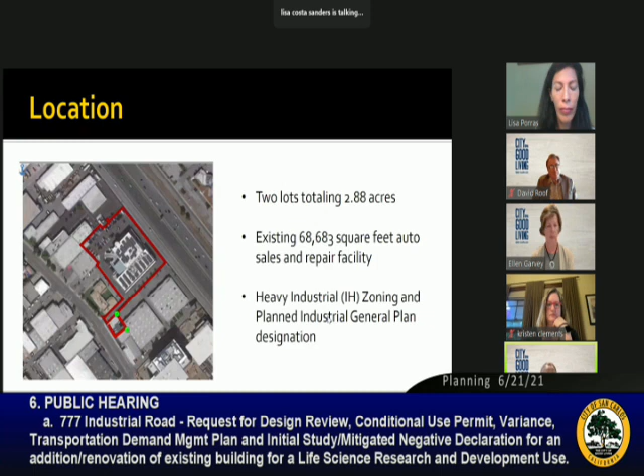The study is currently underway and scheduled to be complete in September. The City Council requested that all projects within the study area that include a request for a planned development zoning designation be considered after the completion of the study. The project before you is not subject to that stipulation as it complies with the underlying zoning with the approval of the requested entitlements before you.

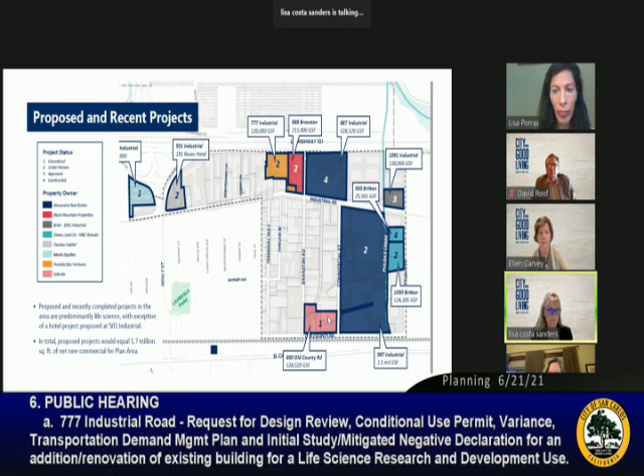Next slide. The site was formerly utilized by Liquid Carbonics starting in the late 1950s, and was acquired and operated by Praxair from approximately 1996 to 2003 for the manufacturing, repackaging, and distribution of industrial gases. The site is currently developed with an auto sales and repair facility with at-grade covered parking utilized by the Honda dealership. The applicant, Presidio Bay Ventures, acquired the property and proposes to redevelop it for life science use.

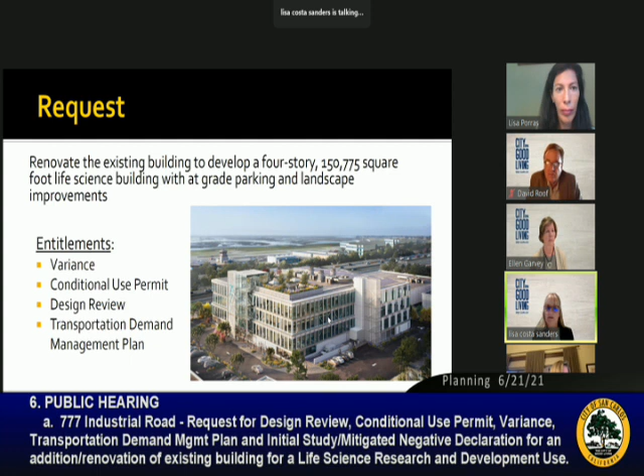Next slide. The applicant proposes to renovate and add on to the existing building to develop a 4-story, 150,775 square foot life science building with at-grade parking and landscaping improvements. The requested entitlements include a variance, conditional use permit, design review, and transportation demand management plan. Now I'll walk the Commission through each of those entitlements.

The request for a variance is from the floor area standards, specifically to exclude the covered parking area, about 28,320 square feet, from the floor area calculations. The existing building was constructed to provide ongoing access to the monitoring wells as part of the remediation efforts, as well as observation of the groundwater contamination at the site.

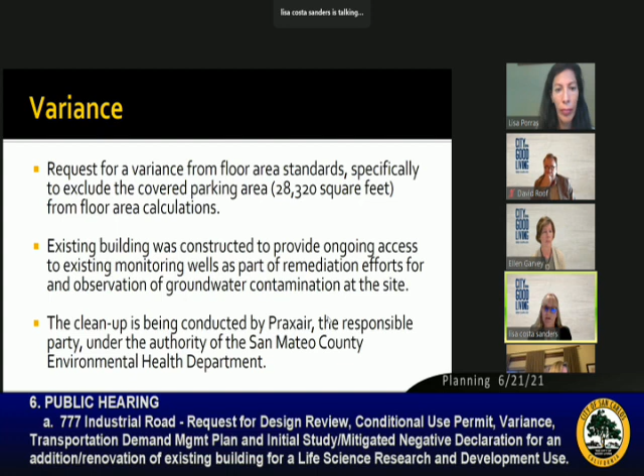The cleanup is being conducted by Praxair, considered the responsible party for the contamination under the authority of the San Mateo County Environmental Health Department. As shown in this graphic highlighted in yellow, the site includes many monitoring wells maintained by Praxair. As you can see from their location, they cover a large portion of the property and really limit the development opportunities.

With the Honda dealership, they were quite creative and found a way to build above those monitoring wells, but still allow continued access to them by placing at-grade parking beneath the building.

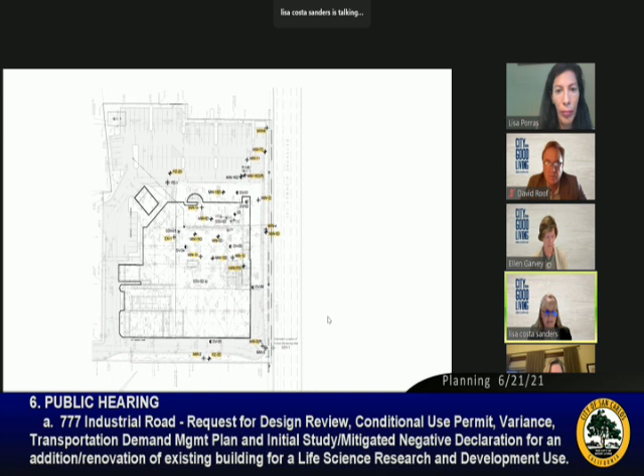On the next slide, staff finds that the required findings to grant a variance can be met at this site. The presence of the active groundwater monitoring wells is exceptional and extraordinary. The monitoring wells present a physical hardship that limits the development opportunity at the site. The granting of the variance will not be detrimental, as evaluated in the mitigated negative declaration, and the project is consistent with the general plan as well as zoning.

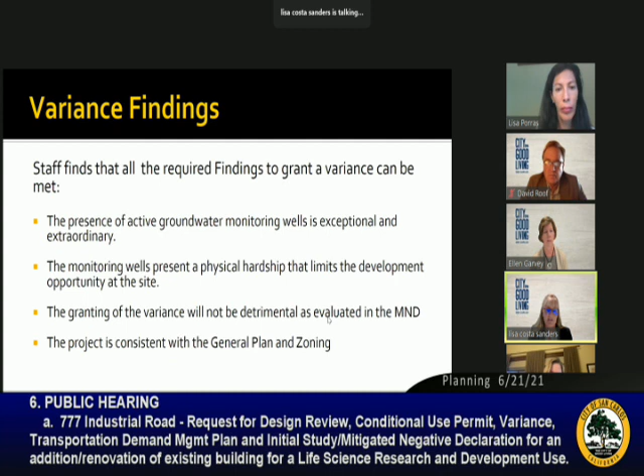The conditional use permit is requested to allow 2 stair towers. Both comply with the 16-foot height projection, but not the corresponding setback from the wall face without the issuance of a conditional use permit. The code requires that for each foot above the 50-foot height limit for a tower, the element must step in 1 foot from the face of the wall. In this case, it either projects away from or is flat with the face of the building wall, so the code allows a conditional use permit to be issued by the Planning Commission.

The stair towers are centrally located on the building with large setbacks from adjacent properties. The stair towers add to the architectural interest of the building, and staff is supportive of the conditional use permit request.

Next, for design review, this facade is the northern facing elevation, which is the main entrance to the building. The renovated building would maintain much of the existing footprint, but seeks to create a more uniform and larger dimension compared to the existing building, and would include changes in wall planes and building heights. The design shifts the building from a predominantly concrete facade to one of glazed glass, with variation in materials and patterns, as well as offset floors to accentuate sections.

The proposed exterior building materials include brushed aluminum slab covers, spandrel or opaque bird-safe glass, exterior glazing, and cement plaster. The facade for this stair tower would be perforated metal with backlighting to provide greater contrast with the building face.

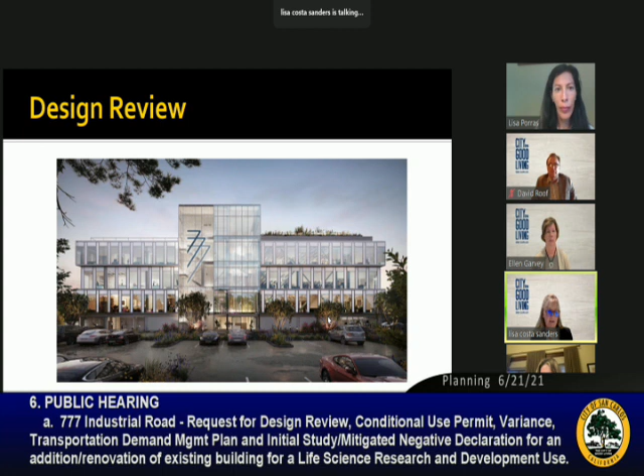The next view is a rendering of the building, showing the north and west facing elevations. The building is 3 stories of life science use above covered parking area and complies with the 50-foot height limit. You can also see the rooftop landscaped amenity feature that would be available for building occupants. The next view is of the building along Highway 101.

Here you can see the south and east facing elevations, as well as that tucked-under covered parking area. Staff is supportive of the architectural design of the building.

The applicant has also submitted a transportation demand management plan with measures to achieve a 20% trip reduction. That includes bicycle parking, a repair station, showers, a changing facility, as well as a commuter program with marketing and outreach to encourage transportation alternatives. This TDM plan has been reviewed by the City/County Association of Governments, and they found it meets the requirements of the county's congestion management program. The city's transportation consultant also reviewed the plan and found it complies with the city's requirements.

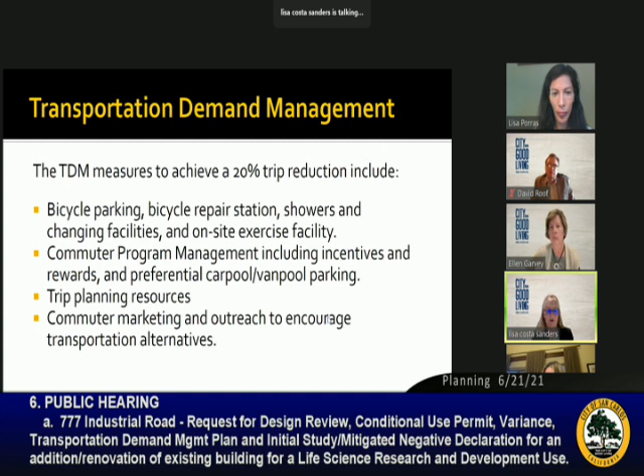On the next slide, I've shown you the distance the site is from Caltrain. It's approximately a half mile to the Caltrain station, about a 12-minute walk.

Finally, a mitigated negative declaration has been prepared in accordance with California Environmental Quality Act guidelines. That analysis found the proposed project would not result in any significant impacts to the environment with the implementation of mitigation measures. The project is subject to mitigation measures included in the MND, as well as attached to the resolution in your packet. These are standard for this type of development and include construction best management practices, nesting bird survey, measures if cultural resources are discovered, requirement to implement the recommendations of the geotechnical report, as well as implementation measures for the TDM plan.

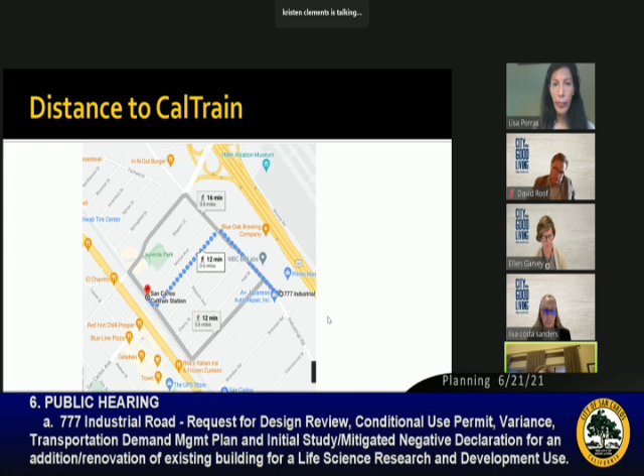Thank you very much. That's all the questions I have, Chair. Thank you. Any other questions?

I just had one comment, and Commissioner Clements got to the issue of trees. 41 trees were required and 47 trees are being proposed. I was hoping for more trees, and Lisa, it sounds like the fire department has some regulations that necessitated this, because when I looked at the one rendering that showed some trees, they looked really spaced apart, and I thought we could fit in more trees, but it sounds like we actually can't because of these fire codes. Can you clarify that?

Well, it's really around the fire access route, so it just takes you around the perimeter of the building, and then also that flag access driveway. Between that access road and the building, it's difficult to have any large trees because they're going to grow and block the fire access. But in the parking area and around the perimeter, there would be an opportunity. We can have the applicant maybe discuss if there's an opportunity to add additional trees to the landscape plan.

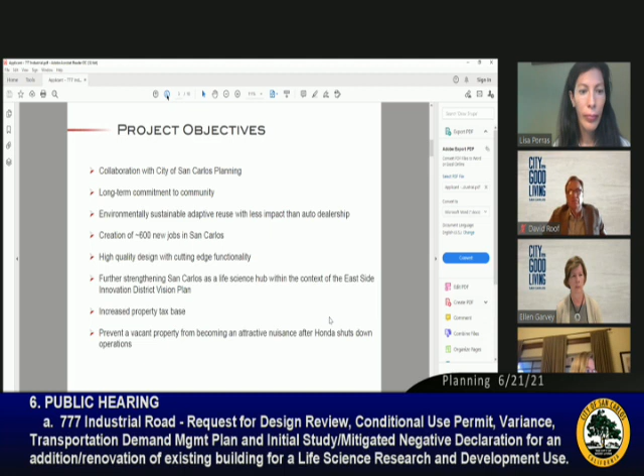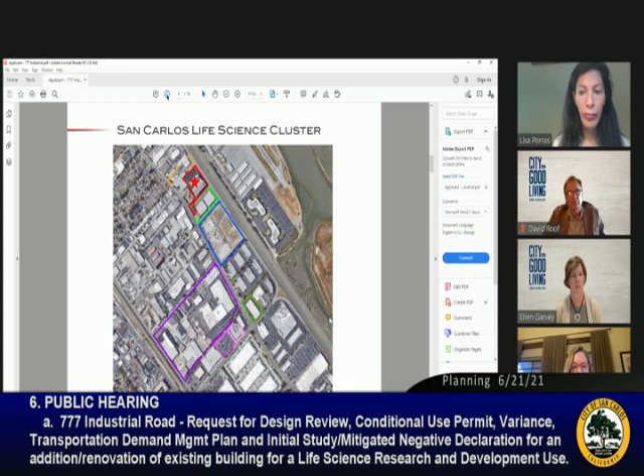Lisa, if we could go to the next slide. We've touched on the fact that this is within the existing and burgeoning life science cluster. If we can go to the next slide - as it relates specifically to our project, we covered the odd panhandle shape configuration of the site itself.

Touching on the comment about trees, we've sought to maximize the placement of trees within the constraints provided to us by fire. This is our latest landscaping plan, and to the extent possible we've continued what exists in terms of trees along Industrial in front of the Melodic Remedy studio, and tried to maximize the parking lot immediately on Industrial that wouldn't have fire restrictions. You can see on the bottom right of the screen that's really where we've concentrated a lot of the landscaping in terms of larger format trees. We do still have trees along the building itself, but given constraints within the fire lane, we've had to maintain species that are shorter in height and narrower in canopy.

In fact, those larger format trees providing shade through the surface parking area were actually twofold, further covering the drive aisle to the east - that's what we had to keep clear to provide unobstructed fire lane access. So the original intention was to have a double canopy along those islands, but unfortunately we weren't able to accomplish that. We've maximized the site landscaping, and though we're limited in the number of large format trees with wide canopies, it will be a lush site that we hope accomplishes the goals the commissioners raised around landscaping and mitigating the heat island effect.

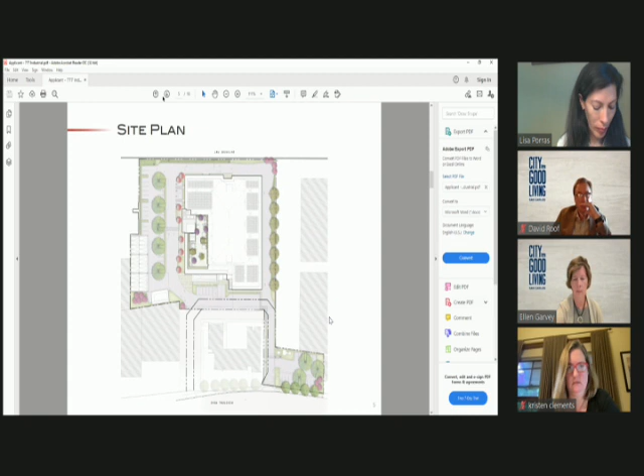If we can go to the next slide - by point of comparison, we actually have 47 trees compared to the existing 24, though our footprint is essentially the same as the existing building. We're squaring off the existing footprint and adding a full floor to the project within the height limit, with the exceptions Ms. Sanders highlighted. But we're close to doubling the number of trees. Again, we'd hoped to provide more, but ran into those limitations.

We're also providing extensive bike parking facilities, locker rooms and showers, as part of our TDM measures, 20 carpool and van pool spaces, EV charging, and motorcycle parking spots, all of which we hope will help enhance the optionality of commuting and transit to and from the building.

As a building, we're also going to be providing e-bikes as a building amenity so that our tenants during lunchtime and so on can take those, even if they don't have a bike or don't have one at their workplace, can just grab a bike and ride downtown, again to help mitigate and minimize the congestion.

In fact, the city's traffic engineers' transportation study demonstrated that with all of that, the proposed building, despite its size increase, actually decreases daily traffic and peak hour traffic won't change from prior to the dealership that's in place, which is a rather heavy and impactful use. If we can go to the next page, please.

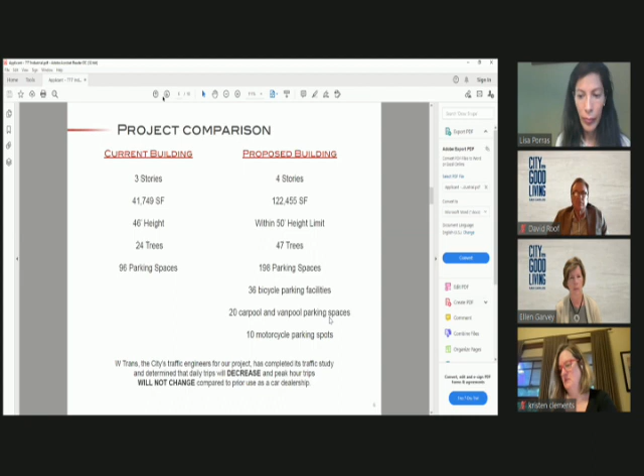We, as a firm, are really committed to ensuring that we're a long-term member of the community, and look to ensure that as part of any planning process, we're listening to and trying to address as much of the concerns that may be directly related to our project, but also may have broader implications to the neighborhood, unrelated to our project at least directly. This is some of the broader categories of items of discussion we've had with various neighbors and members of the community, and some of our responses as well.

There was some question and concern around light pollution, particularly given the proximity to the residential housing. In accordance with LEED standards and Cal Green, we'll have light sensors and motion sensors all the way throughout. There won't be any light pollution, in that all the site lighting is going to be concentrated and directed strictly to the minimum levels of foot candles required for code compliance, and focused on the pedestrian areas of circulation on the site.

In terms of landscaping and the pedestrian views, there's a slide here showing before and proposed that highlights that we really sought to enhance the surface parking lot on Industrial, which is really the only frontage on Industrial that we control, to significantly landscape and essentially obscure the view of our building.

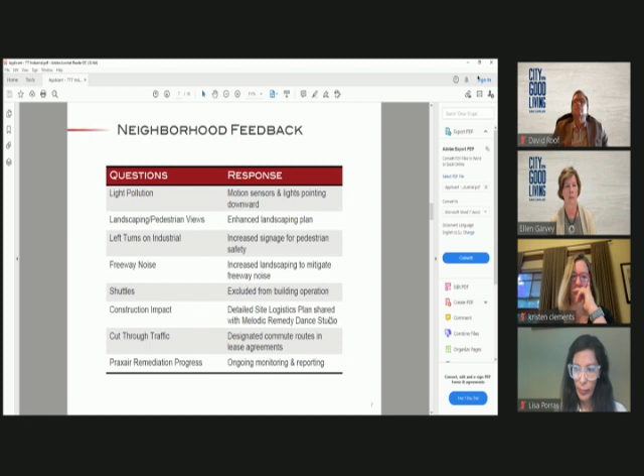Further, and again we're unsure of the circumstance around this, but our site and the 767 site, which is the property where the dance studio is located, depend on reciprocal easements for ingress and egress.

There's no intention of impacting or shutting down either of those sites, since both are dependent on them. We understand there may have been some closure during the construction of the Primo Honda sites, but that was really the extent of the concern and the communication.

We also had discussion around the existing remediation efforts that Praxair is responsible for, and provided an update on the status. That is ongoing, and from Afton, the consultant overseeing the remediation, their reports show it is progressing very positively, which is great news.

If we can go to the next slide, please. This was just a highlight of the site logistics plan for construction, showing that we would be staging and handling all of our materials and storage within our property and away from the easements and access.

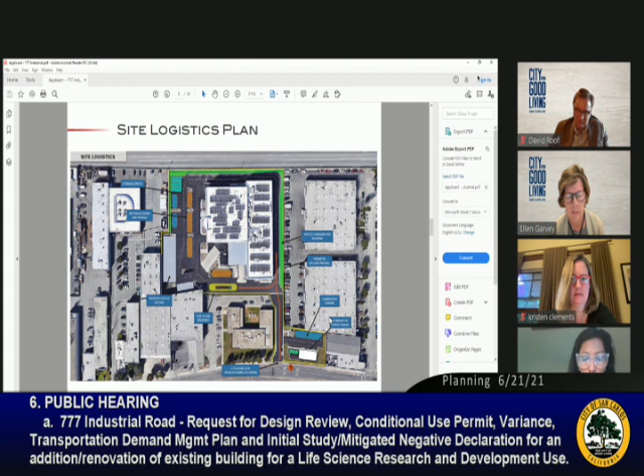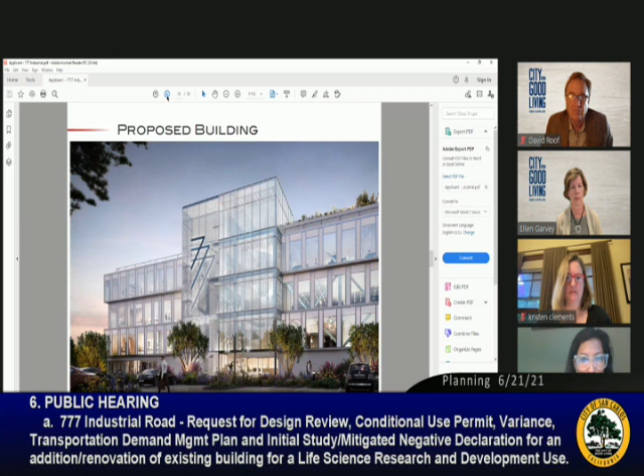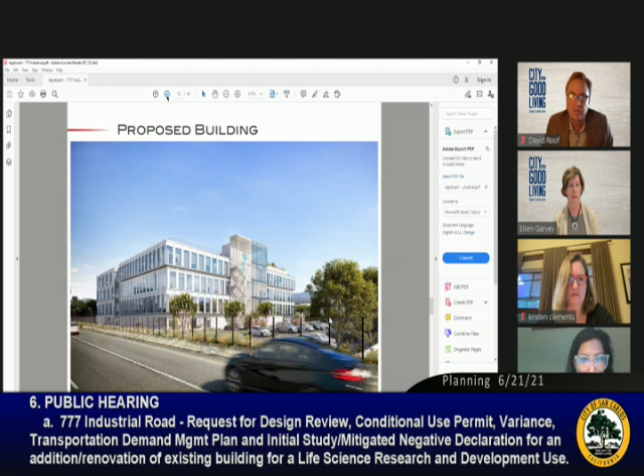If we can go to the next slide, that's the enhanced landscaping we're proposing, again just to obscure the building. I'd note the building on the right in the rendering was our assumption of what the 888 Branston project would look like—it may not be 100% accurate. We just wanted to show that our project's view is obscured from Industrial Road.

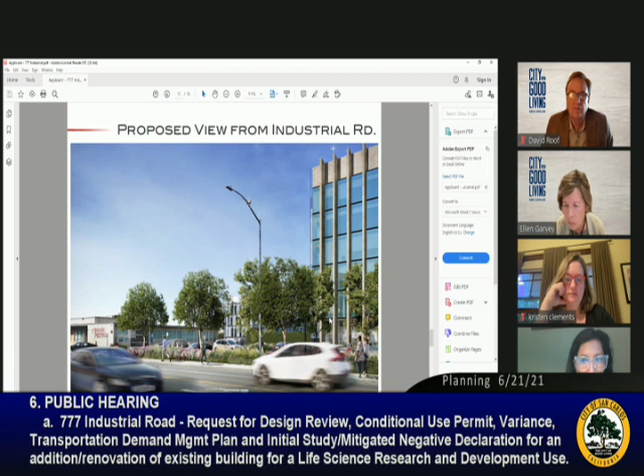Just some highlights in terms of our ongoing commitment to the community: we are members of the chamber. Presidio Bay, as a firm, has a longstanding commitment to education efforts. We have an ongoing real estate scholarship program that we're running every summer. This is the inaugural year of us doing it formally.

We plan to continue that. We're also building out extensive childcare in several of our facilities and projects. Similarly, we're not just commercial developers—we do quite a lot of housing and multifamily development, and have been speaking with Al and Lisa about opportunities to explore housing production and residential development in San Carlos. While we build commercial, it's also important to provide housing for those seeking jobs there, to help address our housing shortage, which is affecting every jurisdiction statewide.

So with that, I just wanted to thank the commission for your time. Lisa, I think we can go to the next slide and hold it there.

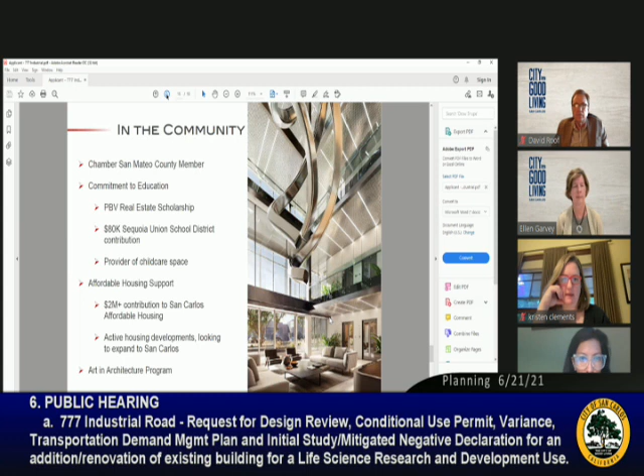Thank you very much, Mr. Sanandaji—I hope I pronounced that correctly. You did. Thank you so much for your time. We're available for any questions. My colleague Sandra is here as well, who's the architect and can speak to any of the more technical questions.

Well, thank you. One comment before I ask my fellow commissioners if they have any questions of you or your architect before we hear from the public.

I was pleased to be refreshed with the rendering showing all the trees you'll be planting out front by Industrial, by that parking area. I drove down Industrial today past the new Meridian complex that is just finishing up, and they are fully landscaped. For the first time, I saw two people jogging on that new sidewalk by the building and one person walking a dog, so it was really pleasant to see. If they continued down the street, they'd run past the new trees you'll be planting in that new parking lot. So I was really pleased to see that rendering.

Thank you. Do any of my colleagues have questions of the applicant or the architect before we hear from the public? I have a few. Oh, go ahead. Commissioner Roof, and then we'll go to Commissioner Bradley.

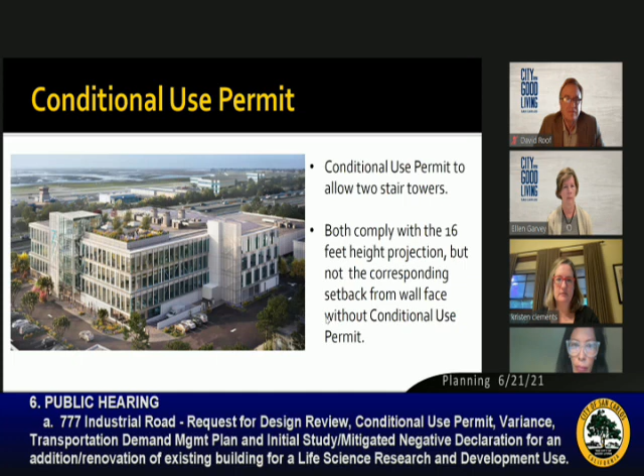I think the best view would be the rendering with the trees—the one with the 3 trees and the higher building to the right. That's the pedestrian, vehicular, and bicycle perspective of the project, given the panhandle shape of the site—it's essentially straddling the freeway.

Right, so it's set back and not directly visible. And then the entrance—which side of the building is it on, this close side? That's our property and entrance where the monument sign is. Got it, which is currently shared via the easement. Well, the shared easement is actually on the northern side, on the northern side of the Melodic Remedy building.

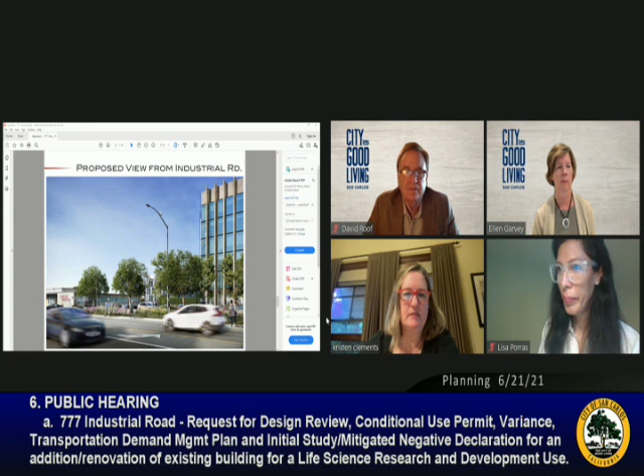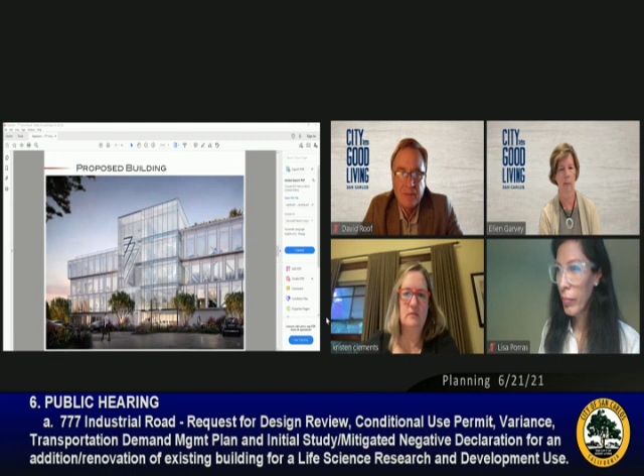Lisa, do you mind going one slide back? Perfect—so the current Honda monument sign location would stay, but that marks the entrance to the property. Lisa, if you don't mind going to slide 4, I was just going to pull up the landscape plan to point that out. Yeah, you can see where the arrows are—that's our property there. And the easement is actually on the northern side, that gray area.

So in essence, the tenants of Melodic Remedy and ours would use what Lisa just highlighted. Okay, and the dance studio is right to the left of the red dotted line? Is this one? It's that building, exactly. That's right—thank you for clarifying that.

One of the challenges in industrial buildings is trying to balance the needs of the buildings, which often have surface parking and a center building with parking around. It's a large structure with something that hopefully is a little more fine-grained that people want to walk near and be close to.

You certainly hit the mark on the attractiveness, and it's too bad it's really hidden from the street. It's more of a highway view, which is all good, but at some point perhaps those front parcels will also be redeveloped, and hopefully we'll get more of a view of your pretty building when that happens.

I wanted to also commend your use of parking stackers and making the most of the space that you have. And I'm excited to see the TDM program resulting in a decrease of parking spaces, providing additional ways to get to Caltrain and using the assets we've got, even though you're situated so well close to the highway. That's great news, I think.

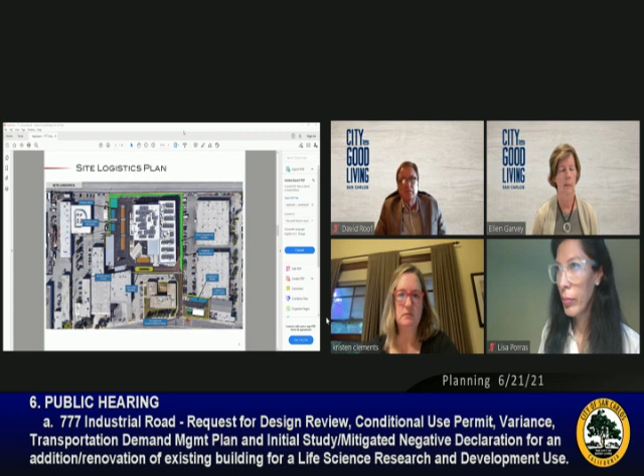When you mentioned that you did include childcare spaces in some of your buildings, I was wondering whether that was a consideration for this building, and whether that did not work out. Candidly, not for this building, but for the new project we're exploring, that is certainly an amenity we're exploring, partly because we are limiting any occupancy on the surface level, on grade, due to the wells and the remediation. Given that there's active remediation at the site, we don't want to encourage that type of use. So our other project, which we've just started, is more appropriately positioned for that.

Thanks, two more comments, then I'll hand it back off to my other commissioners. One, you named different organizations in the community you were talking to. I wanted to suggest that the ability to use office space or meeting space for the community is going to be in high demand for some of our nonprofits as they go through a difficult period with giving and have had to consolidate operations. In full disclosure, I'm on the Community Foundation Board of San Carlos, and that's another avenue for you to talk about these issues. I know this has been brought up on other projects, the access for the community to meeting spaces, and the ability for nonprofits to potentially share or access cubes and office spaces. So I just wanted to run that by you and see if you're open to that.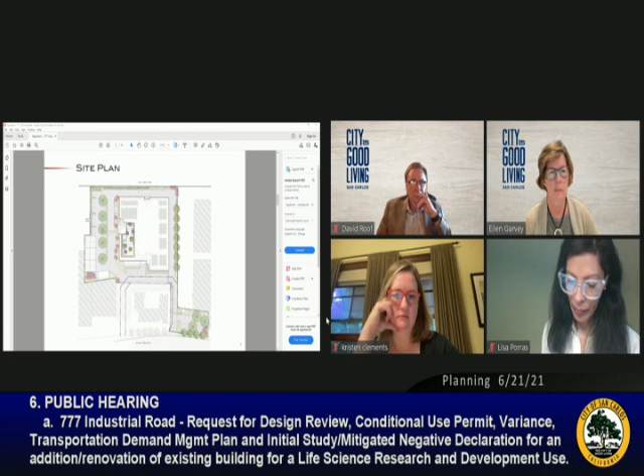But everywhere else other than the occupiable roof deck is going to have those solar panels reinstalled. And because we have more roof area, we can actually accommodate the solar panels that are all there despite these additions. That's good to hear. So you'll be able to accommodate the roof recreational area with still the same quota of solar panels that were there and that you still need, and the additional mechanical infrastructure as well. All right, that's very helpful and good to hear.

Thank you. My second question, I wanted to learn a little bit more about these stackers. This is the first project I've been on, I think, where there's been stackers used in a commercial situation like this. In reading through the packet, it said that the stackers would be somewhere between 3 and 5 levels, TBD for the future. I'm wondering if you've decided a little more firmly how many levels it is, and I couldn't quite figure out how many levels were going to be below grade. Can you help me just understand a little bit more about these stackers?

I absolutely will. And they say a picture paints 1,000 words, and I'm remiss for not including a picture, but I will try to describe what the shuffler or puzzler system looks like. There's no below grade excavation, so it's actually on grade. Picture driving into your garage at home.

It has a roll-up gate or garage door. You drive in, and there's really only 2 or 3 dedicated spots that you would drive into, and everyone drives into the same ones. Almost like a game of Tetris, what you're driving onto is a platform sitting on small wheels, tied to a system with pulleys, rails, and tracks. You would pull in, park your car, and leave. That is your dedicated stall that you will always park in, meaning the same gate you always drive in and out of.

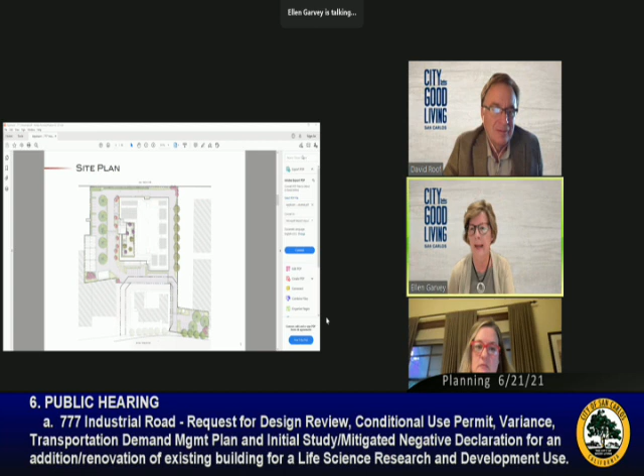Okay, great. My question follows nicely from the one on parking. The TDM plan - I was pleased to see you used conservative estimates for the number of employees per square foot for office space and lab space, so hopefully the TDM plan holds in terms of the amount of trips required by the building. But as you were alluding, there's some uncertainty about that.

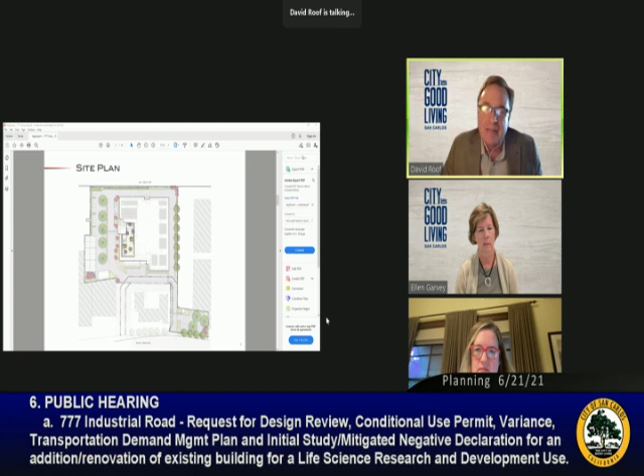So I saw that there's a 5-year review of the TDM plan. Is that 5 years something mandated by the law or code, or is that something built into this proposal? I don't know if that's a question for the applicant or for the city staff.

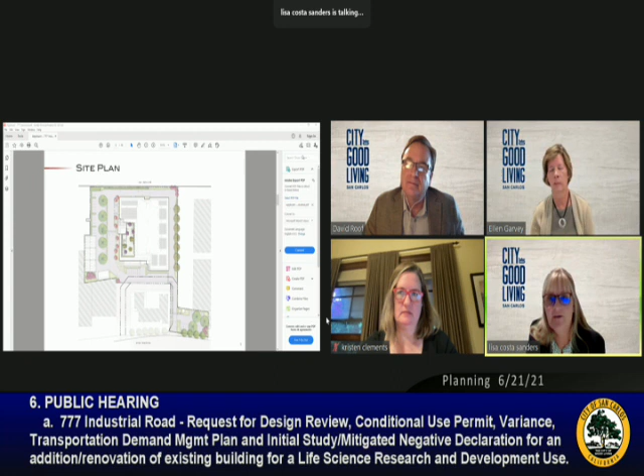I'm curious. Yeah, I'd be happy to answer that. We've placed it in two areas for this project. The city's municipal code does require the monitoring, specifically after the 5 years.

We've also included it with the mitigation monitoring plan that's part of the CEQA document, because we're relying on implementation of the TDM plan to comply with the new CEQA requirements for vehicle miles traveled. So we need to show we're reducing trips and complying with vehicle miles traveled. We've also included it as a mitigation measure to ensure ongoing monitoring, and if they're not meeting that trip reduction, they'll have to come up with another implementing measure to do so. So we've got it in 2 places.

So that would be a 5-year run, and then there's an opportunity to fix it if needed. That's correct. Yes, 5 years seems pretty long, but at least there's an option to fix it.

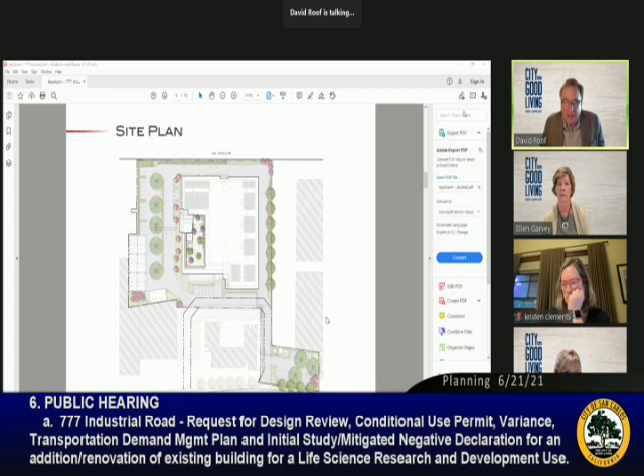Is there a drop off for the applicant, a drop off zone, or for car services, or if the shuttle were to come along there, where would that sort of activity be conducted?

Commissioner, if you see there's an ADA path by the middle large tree in the parking lot going to... Oh, the crosshatched? That's the crosshatch there, yeah. That area is essentially a passenger loading and unloading zone. The idea would be that through cooperation with rideshare services and so on, we'd designate that as the passenger pickup and drop off area right at the front door of the building.

I see, okay. Yes, so it's a way to multi-purpose that space with the fire department needs, and also have it be a drop-off zone. Okay good, I'm glad to see that's there.

I was happy to hear you're providing e-bikes, because with all these big buildings going up, it's nice if employees have an opportunity to zip into town to go shopping or to a restaurant during lunch. So the e-bike plan sounded really good. Was that part of the TDM? Is it a mandated thing, or a nice to have?

No, I don't believe so, but that's just something we've always provided bicycles for as part of our developments. Now that e-bikes have become more prevalent, given the distances we're talking about, it makes riding a bike a lot more accessible to folks, even with joint pain or otherwise. It's not necessarily a strenuous activity to ride down to Laurel Street downtown from the site. Those things go relatively quickly too, but it's just something we've been doing. There are other mandated requirements, like a transit screen, and we're putting a very prominent one in the lobby, integrating it into part of the art we're doing in the entry area. But no, the e-bikes are just an example of something we like to encourage, sort of out-of-the-box thinking to promote different behavior.

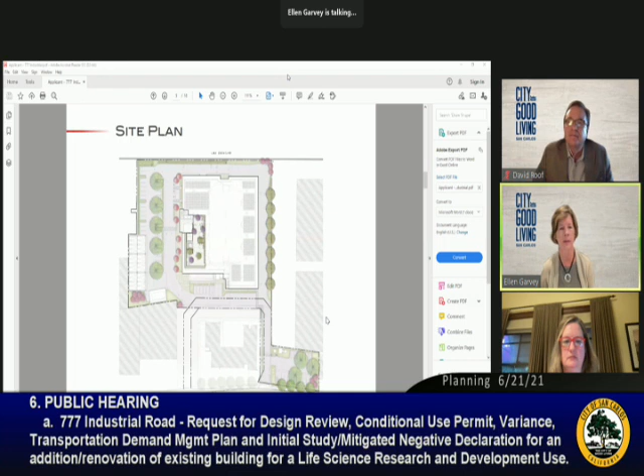Okay, that's all the questions I have at this time. Any questions from any other commissioners of the applicant, the architect, or staff before we hear from the public?

Bradley has one more question, and I'll precede it with a favorable comment. I was delighted to see a relatively small sign, and I believe it doesn't face 101, which in my opinion always creates safety hazards and distraction for high-speed driving on the freeway when there's advertising or directional signs on buildings along 101. Congratulations on that sign item.

Question is, there were comments from a leasee or developer next door, the adjacent 767 property - I believe it's a dance studio for young people - with an idea of increasing the width of the easement for access to both your building and theirs in the future. They had some good ideas, and I didn't see follow-up from the developers and the staff. Can you put a little light on that for me, please?

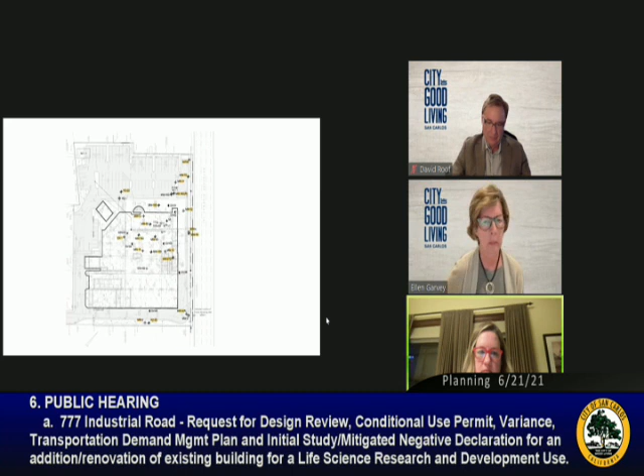Well, I can give my thoughts on this, which is that because of those wells and the desire not to put the parking underground, they're stuck with at-grade parking, and that makes it fall under the parking square footage to fall within the FAR. But it's sort of an exceptional circumstance formed by the need to maintain those wells, and so the fact that the parking is included in the floor area ratio seems like something that is exceptional and a pretty good reason to provide the variance.

I think the point was made pretty well already that the variance isn't impacting the number of cars or parking spots that would be required, just whether we make an exception to the floor area ratio rule with regards to parking. So maintaining the foundation and the existing structure is kind of an integral part of this project, and if they're going to do that, I think it makes sense and it's a reasonable justification to provide the variance.

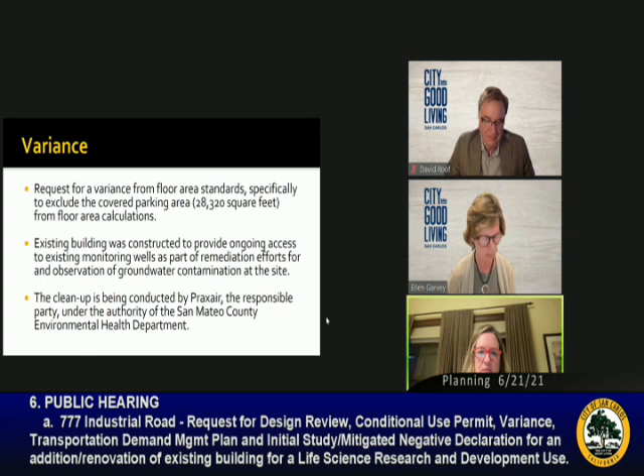I'm hearing general agreement then on the variance. Any other comments before we move on to the conditional use permit?

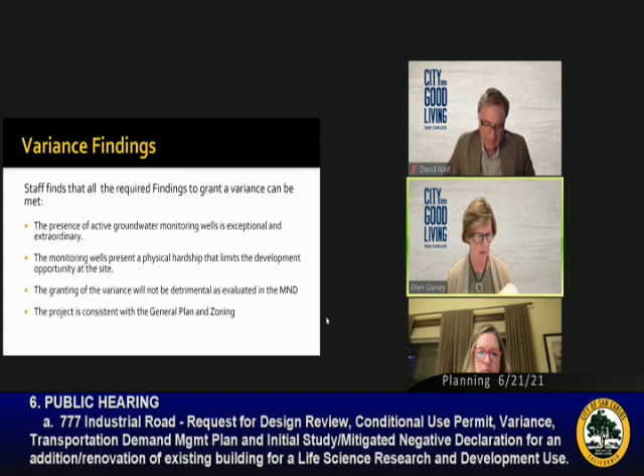All right, let's move on to the conditional use permit. This relates to the stairway and the height. Given the 16 feet above 50 feet for the elevator, the stairs should be set in, and they're not, they're on the face. So therefore the setbacks are not met. The building itself is set back in compliance, but the stairs are not set back. They are on the facade. Any comments on this?

Well, I could comment. I find the visible stairs to be an important design element in what is otherwise a fairly boxy building, and so its visibility enhances the popping out of the stairs. I find it to be an important design element. I have no problems with this exception, and therefore the need for the CUP.

Commissioner Roof, Vice Chair Roof. I agree, and it is a pretty big... not the right word... allowing the conditional use permit to have these stairs, really they're protruding instead of being recessed. So it's a pretty big impact on the overall height of the building, I'd have to say.

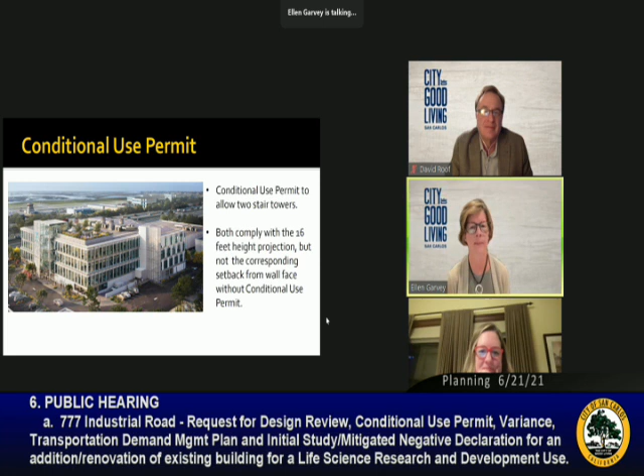All right, any other comments on the conditional use permit and the findings? All right, hearing none, I'm hearing agreement amongst all the commissioners for the conditional use permit.

Now we will move on to design review. There are 5 findings. These relate to the zoning ordinance and the compatibility with the general plan and the overall design and quality of materials. Any discussion on the design review?

Well, this may be redundant, but I would state again that they made an unattractive building a very attractive building with the choice of materials, the scale, the massing, saving and using plenty of solar panels, innovation of using the stacked parking, and something we haven't mentioned much so far is the attractive roof deck area.

I agree with that. Well put, Commissioner Bradley. I'll tag on to that. That roof deck is going to have the best view and look so neat. That's just a wonderful design feature. So yes, I'll add my voice to that. Looks good, I concur. I want to go up there and have a fundraiser already.

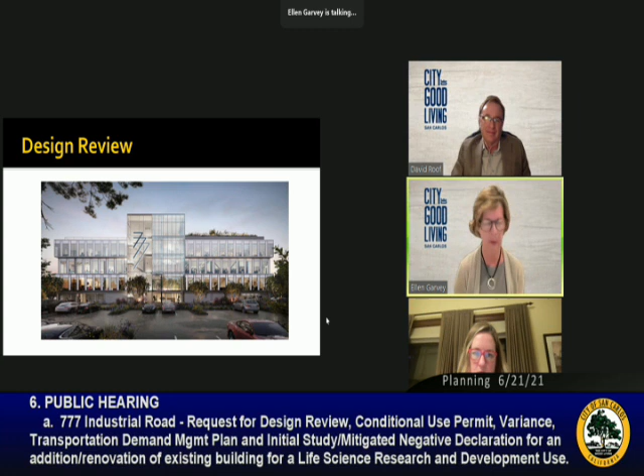Hearing no further comment, I am taking agreement amongst commissioners on the design review questions. That brings us to the final area for discussion, which is the transportation demand management plan and the 2 findings that need to be made. Who would like to open up the discussion? Vice Chair Roof, is your hand back up now, or would you like to wait?

I can start. I think the plan seems pretty good, but there's a lot of uncertainty in how things are going to work out in terms of how many people there are, and they've done their best estimate at what that will look like. But nevertheless there is a lot of uncertainty, and in the context of the overall development in the area, whether there are compounding impacts that could lead to traffic problems.

All 3 of the public comments we received had some element of concern with the transportation impact. Our leverage as a city, once we say yes now, is that they're good to go for 5 years. I'm sure there will be good citizens willing to talk, but we don't have legal leverage to extract concessions or solutions necessarily once we sign off on it tonight. There is a 5-year review on the TDM where a new assessment is done after 5 years, but 5 years seems like a long time. So what I'm going to toss out is - I'm not sure about the practicality - but would it be possible to require an earlier review so that if there are problems, we have a way to address them in a shorter time frame, say 3 years?

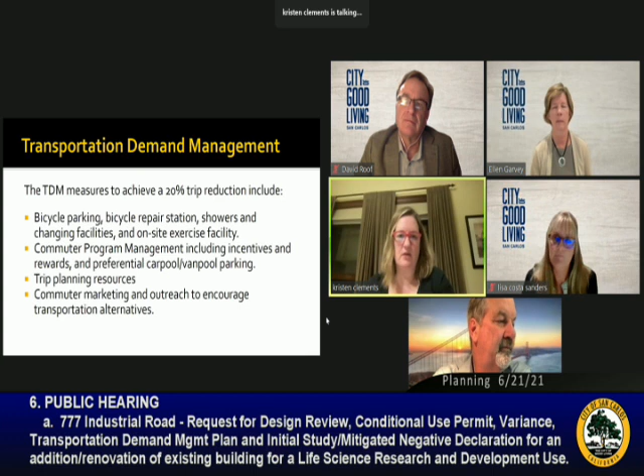Yeah, I agree. If it takes less than 5 years to establish, per staff, revised transportation patterns, and if we think that tenants will be in the building within a couple of years after the completion of the building, hopefully right away, I will trust staff's judgment as to the correct timing to re-examine whether the TDM measures are being effective, based on advice from our consultants and your experience with the TDM program. But I'd also like to hear from the applicant on their thoughts, if that's okay, Chair.

That's okay. And I think I saw a hand up from the applicant.

Sanandaji, would you like to comment? Yes, sorry, I wasn't following the etiquette of raising a hand, so I didn't want to interrupt. But we plan on actively monitoring this regardless of the requirement contained herein.

I appreciate the commission recognizing that we would want the building to be fully occupied in order to have a real measure. So we're in favor of adjusting the timeline such that it's 3 years after completion of the project. We just want to confirm that it's not from the date of approval, which would be too short given the construction period required.

May I ask a follow-up question? Per the applicant's comment, is there ever an alternative threshold where it's a certain amount of time after full occupancy of the building that the measurement could be done? I want to be sensitive to the fact that a tenant can move in and then not actually have it fully occupied. So for the city's benefit, I wouldn't want the evaluation done too early. I'd want it completely occupied with as many employees as were going to be there.

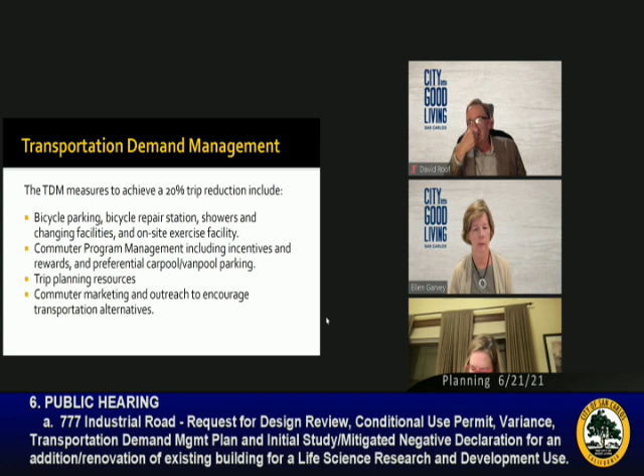It's sort of an organic process. There is a 5-year review that the code talks about, but it does say that annually there is information submitted to the director. So the approach will lead to the 3-year review you put in there, which, my read is, isn't prohibited, but the 5-year review will likely still be required per ordinance. So you'll have the annual reviews, then your mitigation monitoring plan 3-year review, and then the 5-year review. I think that's how it will work in this instance.

And there are no prescribed penalties for not meeting the TDM goals at this time. I think Lisa was correct that it could lead to code enforcement, but in my experience, the purpose of the review is to suggest modified or substituted conditions that would allow meeting the goals of the plan. So if there are changed circumstances or impacts not as anticipated occur, we do have some ability in these reviews to modify the terms.

I would hope all of us would be on that side, Greg, just trying to make sure the mitigations are working as planned, and that we're not really exposing the applicant to additional potential downsides by asking for additional monitoring. As you said, there will be annual reports that will indicate the level of occupancy, so it would be knowable if the 3-year review from COO was appropriate at that time, but all with the objective of achieving the goals of the transportation demand management program.

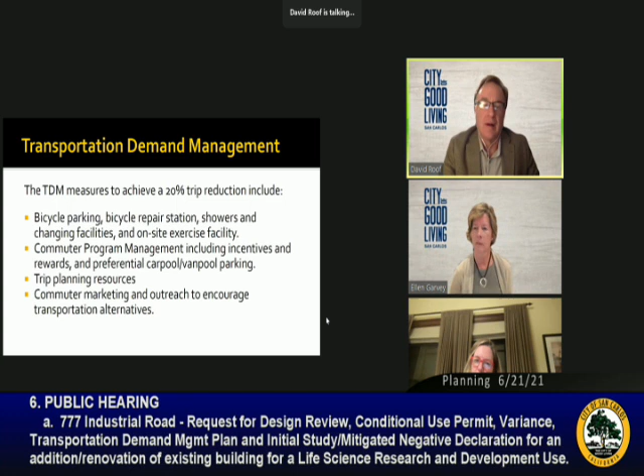That would make sense, Commissioner Roof. From our reading, it's from the issuance of the certificate of occupancy. Okay, it's based on occupancy, because if there's no one in the building, there's no choice. Yeah, then it keeps it simple. If we have 3-year and 5-year, we don't even have to make the occupancy necessary, to me, but...

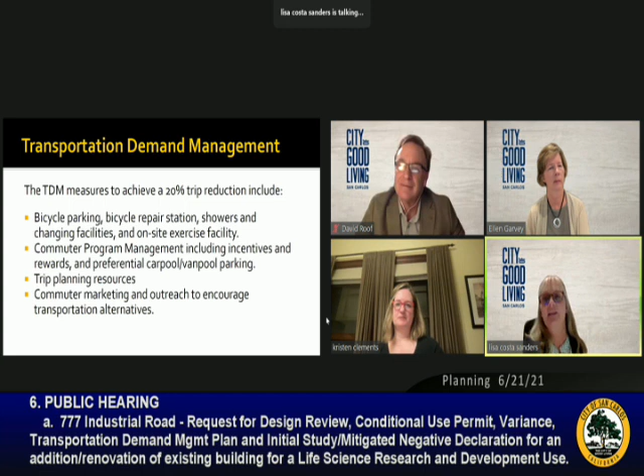May I just clarify what Lisa just said? Whether or not a building is occupied does not mean that it has gotten or not gotten its certificate of occupancy. That indicates it is ready to be occupied, not necessarily that it is occupied, correct? Correct, but typically with these buildings, we're seeing that they're not doing the full tenant improvements until they have a tenant secured. So it's been following that based on the certificate of occupancy that then the tenant moves in. But you are correct, that makes sense. Thank you.

Well, with that, I would say I would support the vice chair's almost motion, if you wanted to make one. Any other discussion on the transportation demand management plan before we entertain a motion?

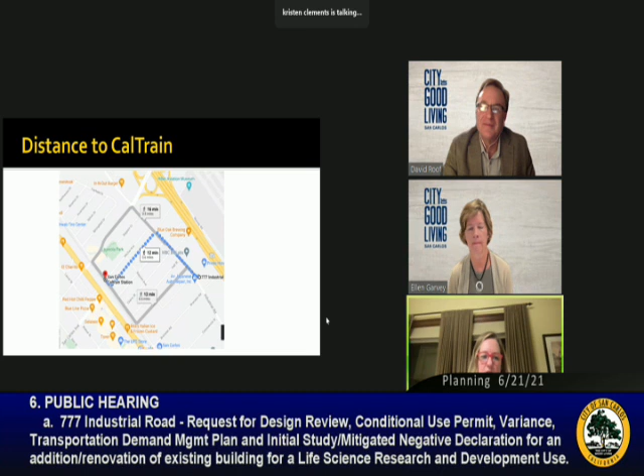May I make one other question, or perhaps comment. When we talk about alternative forms of transportation, it's important to think about those with limited mobility. E-bikes could work, but really only for the physically able, probably who are willing to go fast and don't have any physical maladies that would prevent that from being possible. So I do want to ask, are there alternatives in the TDM plan for people who have limited mobility? Just a thought.

Does staff have a comment or response on that? Just looking through the TDM plan real quick. Sometimes it's the guaranteed ride home, which is probably the most applicable. There's carpool, vanpool, ride matching services. We could add, yeah it is in there. Their commuter service has the guaranteed ride home program. I think that was probably the most applicable. Just clarifying though, has the applicant selected that as a measure? I believe so. Okay, great, thank you. Didn't want to interject again. Yes, we have. Thank you for that clarification.

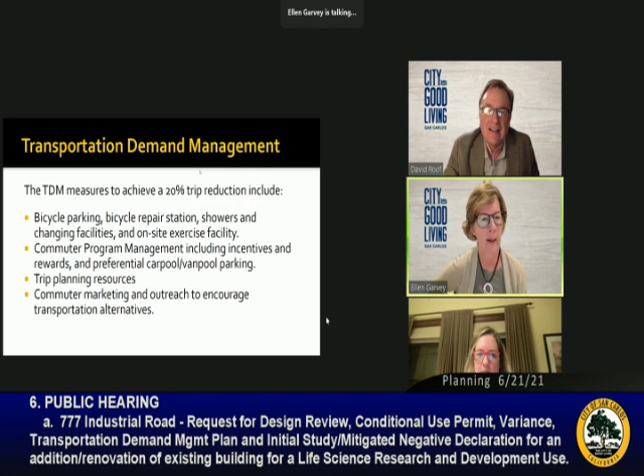Any additional discussion on the transportation demand management plan before we look to a motion? All right, Lisa, if you could put the motion up on the screen.

I guess I would be pleased to make the formal motion, and I might need some help with the wording on the condition. I move that the Planning Commission adopt the resolution approving the mitigated negative declaration and mitigation monitoring plan and grant approval for design review, variance, conditional use permit, and transportation demand management plan for the development of a new 122,455 square feet building at 777 Industrial Road.

APN 046-100-360, and 046-100-070, and 046-100-080, for the reasons incorporated in the staff report and with the conditions in the code compliance and variance certificate, and with the condition that we discussed, which is to, in the mitigation monitoring plan, have the 3-year assessment as well as the original 5-year in both places that Lisa was mentioning needed to be included. So maybe staff could help with the wording on this additional condition we're asking for.

Yes, it's to amend mitigation measure Trans 1, item 8, to require a 3-year and a 5-year review, and also amend condition number 43 in the code compliance certificate to require a 3-year and a 5-year review. So I would like to incorporate what Lisa just said into the formal motion that I'm making. Does that work? I think that works. Yes. Do I hear a second? Second. All right, we have a motion and a second.